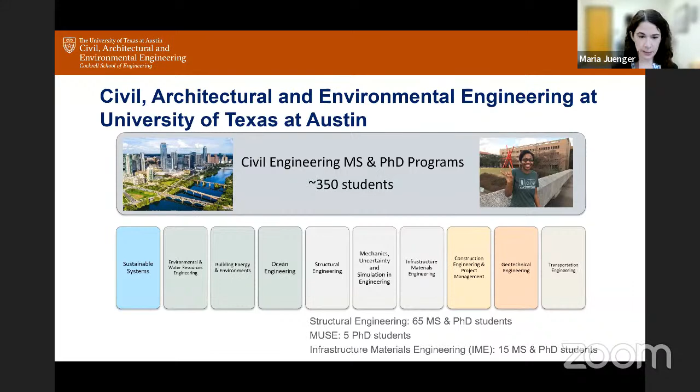Interestingly, I went to Google this weekend and looked up supplementary cementitious materials in images. I do this sort of thing sometimes - I look up green concrete, all kinds of things just to see what Google shows me in terms of images. And 90% of the images it shows me is the little array of SCMs from the Portland Cement Association textbook that has different colors of powders of SCMs.

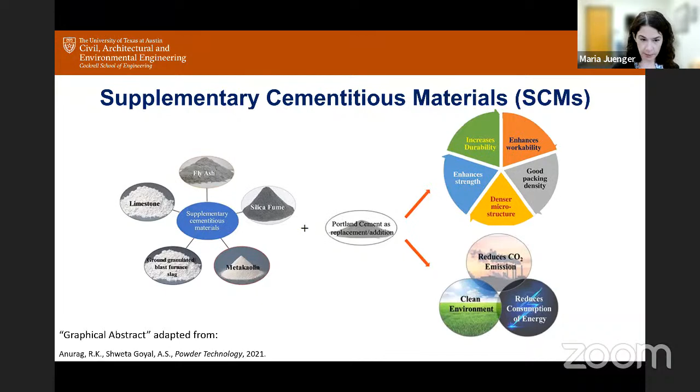Some of it could be changing the thermal energy efficiency in the cement plant. You can switch to lower emitting fuels. You can reduce the clinker to cement ratio, or you can use other innovative technologies like carbon capture. I would argue that these are all really important. However, they each come with a different pathway to get there and a different cost associated with that pathway.

So the reason I like to focus my research on SCMs is because it's something that I can do. I am not capable, as a material scientist and chemist, of actually going through and trying to make a cement plant more thermally efficient. That's a manufacturing issue, right? Fuel switching can be, depending on how you look at it, a mechanical engineering like thermal fluids or chemical engineering issue. It's not a material science issue. Carbon capture is a mixture of both manufacturing and industrial technology, and potentially a material science issue.

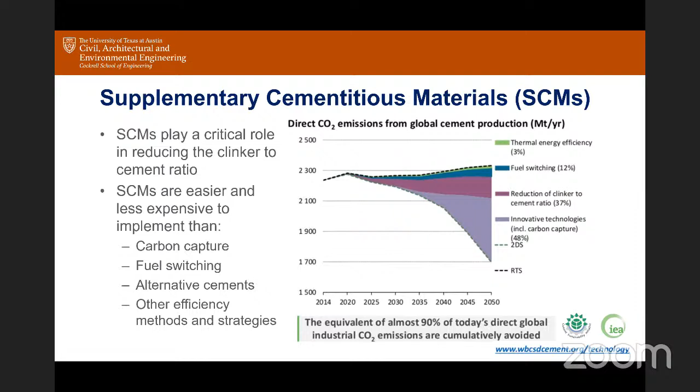Likewise, alternative cements, I've worked quite a bit with alternative cements, including calcium sulfoaluminate cements and geopolymers. And I'm still working quite a bit with geopolymers. Those are harder to implement because it's a technology gap to actually use them. SCMs make concrete that looks like concrete, smells like concrete, behaves like concrete. It's all normal. It makes it easier to implement in the industry. Not to say we shouldn't look at the other things, but they're going to be further in the future.

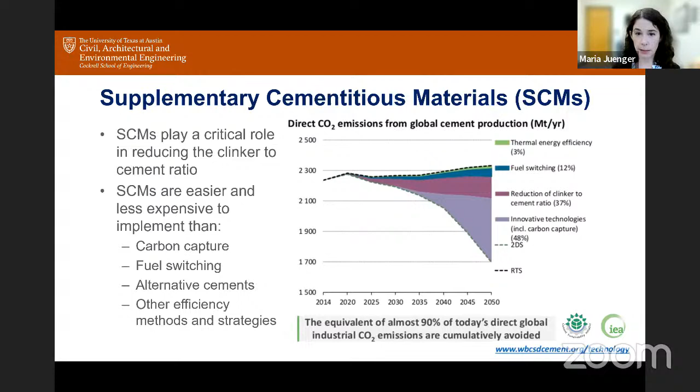Okay, so one of the primary SCMs that people use, hold on a second, I'm looking at the chat.

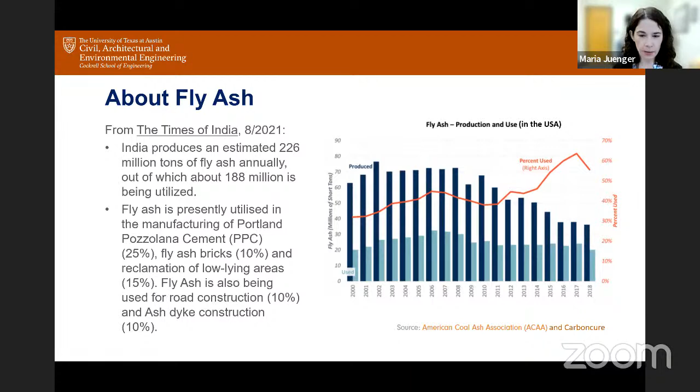So I thought that was really interesting for context. India is in a very different position in terms of fly ash usage, even moving forward, than we are in the US, and in a different position than where we are in other countries as well. The US and many other countries can no longer rely on fly ash as their primary source of supplementary cementitious materials. And that's because there's a huge push to reduce coal burning for power production, for a lot of reasons.

The power plants are aging, and the repair and maintenance costs exceed the cost of building, for example, a natural gas plant or some other type of power production facility. So that's one reason, especially in the US.

In a lot of other countries, it's driven by environmental concerns. They don't want to, they would like to reduce coal burning power.

And so we're in a position now where we can't rely on fly ash because the fly ash production is going to decrease over time. And so a lot of the research that I'm interested in is diversifying those SCM sources so that we can reduce our reliance on fly ash for durability and for environmental concerns in concrete.

One of the ways I think about this is a little bit different than the ways that some other people have thought about it. And I'm increasingly shifting my mindset to this point of view: I don't want a great SCM. I don't want the best. We don't want to be number one. We want to be just good enough. So that's the focus of this talk, is when we're looking for a material, we want a material that is just good enough. I'll explain why in a few more slides.

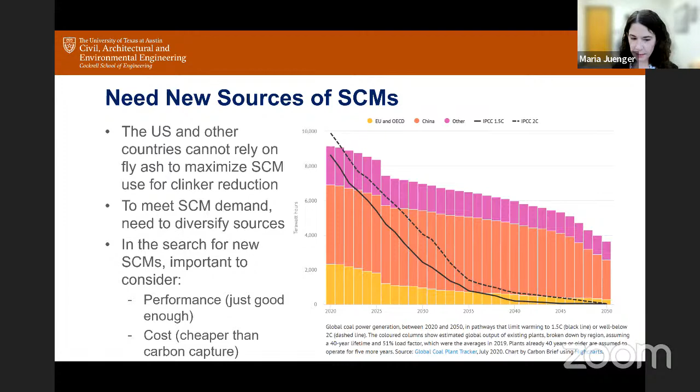The good news when it comes to trying to find replacements for fly ash is it's not a great SCM. It is not a high performer. It is a mediocre material.

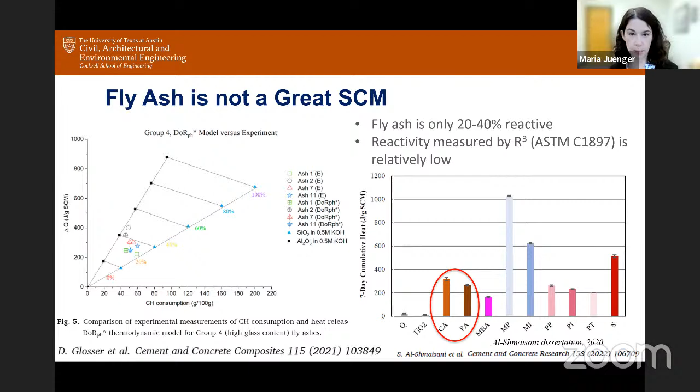If you just look at this plot, this CA is a C fly ash and the FA is an F fly ash. Compared to other materials that were tested, it's not the best. So when we're trying to replace fly ash as an SCM, the bar is low in terms of performance of the material. We're not trying to replace a great material with a great material. We're trying to replace a mediocre material with a mediocre material. And that's promising in terms of evaluating sources.

So in terms of research questions that I want to talk about today: assuming fly ash is our reference SCM, we're trying to replace fly ash in concrete mixtures. We don't need great performance from what we're trying to use to replace it. We just need it to be as good as fly ash, and people will be pretty happy with the performance of their concrete.

The other point to think about is, it is better from an environmental clinker-to-cement ratio reduction perspective to use a high quantity of an average performing SCM than a low quantity of a high performing SCM.

We want to reduce the amount of clinker in our cement, which means we want to have a high amount of SCM in that system, which means we don't need a really highly reactive material to get there in a small quantity. Silica fume at 5 to 10% doesn't really get us much in terms of clinker reduction. Fly ash at 30 to 40% is better. So that's where we're heading here.

So what this opens opportunities for, and what I'm going to talk about today, is impure natural pozzolans. How do we get these sort of less pure, mediocre materials to work in our concrete mixtures? And also blends of materials, blends of natural pozzolans with fillers, for example coal combustion products that are underutilized, and other materials to create these tailored mediocre materials. Let's aim for the middle.

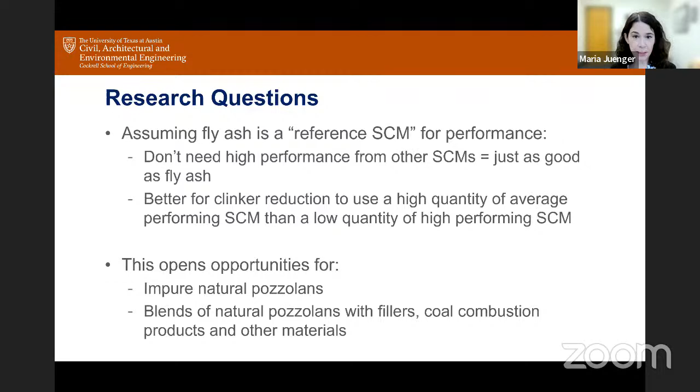In terms of natural pozzolans, we can talk later about what sources are available in India and other regional countries. In the US and in many other parts of the world, we have some deposits of volcanic natural pozzolans.

The one shown here on the right is in Arizona in the US, a quarry I visited in 2019, I think, and this is a pumicite type deposit. You have these volcanically derived minerals like pumice, perlite, volcanic ashes, and zeolites, or you have sedimentary pozzolans, so calcined clays and shales of various compositions, including metakaolins. The sedimentary pozzolans are known to be more prevalent globally than the volcanic pozzolans, but both are considered natural pozzolans.

The general thinking up until recently is that natural pozzolans aren't necessarily great materials to use as SCMs because they're only regionally available, not widely distributed. That's changing. What is slow to change is the commercial availability of these materials. Many of these are easier to obtain for research purposes than they are to obtain for actually making concrete mixtures. That'll change with time as well as the market matures for these materials.

What I want to talk about today is not these really nice, pure, clean natural pozzolan sources, but the stuff that the quarries are throwing away. For example, overburden materials - we'll talk about that. You can take a waste product of an industry, a waste product of a natural pozzolan industry, and also blending materials to try to optimize that mediocrity.

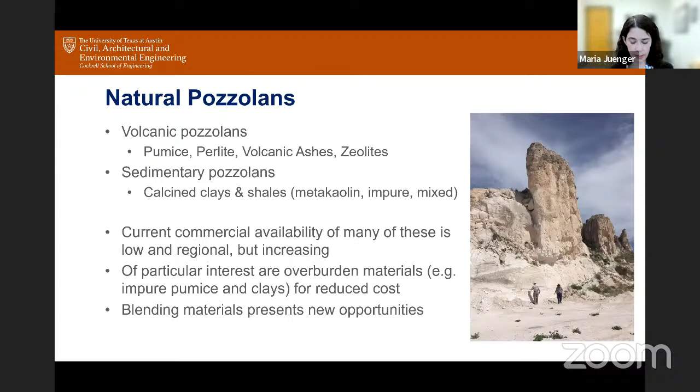Okay, so I'm going to go through some case studies from our research. These are all taken from different types of projects to demonstrate what I'm talking about here. Case study number one is what I would call an impure pumice.

Pumicite is used for a lot of different commercial products. For example, every time you have jeans that you wear, most of those are washed with pumice. Pumice is used in cosmetic products and for a lot of different industrial purposes. Most of what's sold in terms of pumice is a sort of pure white material, and that's what the other industries like.

But in order to get to that pure white material in a quarry - if you look at this quarry, this picture I just stole off of Google search - you see that the top layers aren't so white. That top layer, for an industry looking for a pure white material, is not desirable, so they actually stockpile it and discard it. You take something that's a quarried material and it has a byproduct too. Its byproduct is overburden, as they call it.

If you look at these two buckets at the bottom, the one on the left is a more pure pumicite, the one on the right is an overburden pumicite. It's more tan colored. What we're interested in is: we know the pure pumicite works great as an SCM. How does the tan one work? We can get that one cheaper - it's a byproduct material that nobody else wants. Can we use it for our industry?

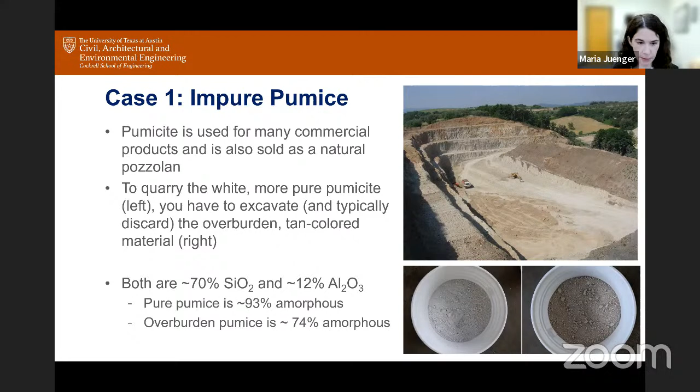They also have overburden. In terms of evaluating these materials, one of the first things we do in our lab is run the R3 test, which started out being called R3 because it's the Rapid, Relevant, and Reliable Test—a very optimistic name. It's now standardized under ASTM C1897.

These mixtures consist of mixing your supplementary cementitious material with a potassium sulfate solution, calcium hydroxide, and calcium carbonate. Then you have two possible means of analysis, only one of which I'm showing here: measuring heat release using isothermal calorimetry over a 7-day period. You can also measure bound water by curing it at 40 degrees and using a furnace, which is simpler, and the industry actually prefers that. In the labs, we prefer calorimetry, while the industry, if they don't have a calorimeter, prefers the bound water method.

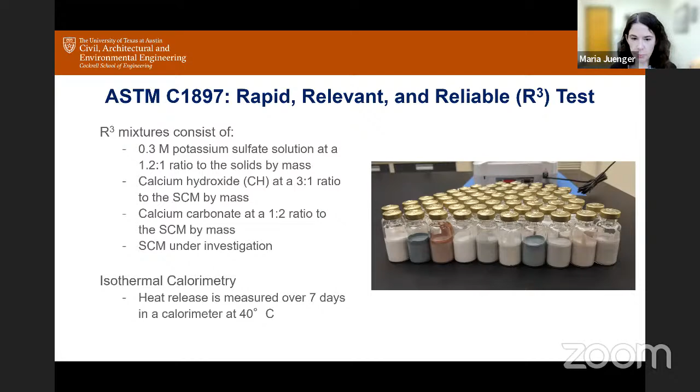As I mentioned, Jason Weiss's Pozzolanic reactivity test is a very similar test, but at a different solution composition and a higher temperature. So there are a couple of tests like this available out there.

When you run this test, you get, in this particular case, the heat released—the 7-day cumulative heat in joules per gram of SCM run in that calorimeter for 7 days at 40 degrees C. Different materials give different values; the higher the value, the higher the reactivity. These gray materials here on the left are quartz, shown as Q, and titanium dioxide. You expect these are not pozzolanic, so therefore they have no heat—that's really just a check against an expectation.

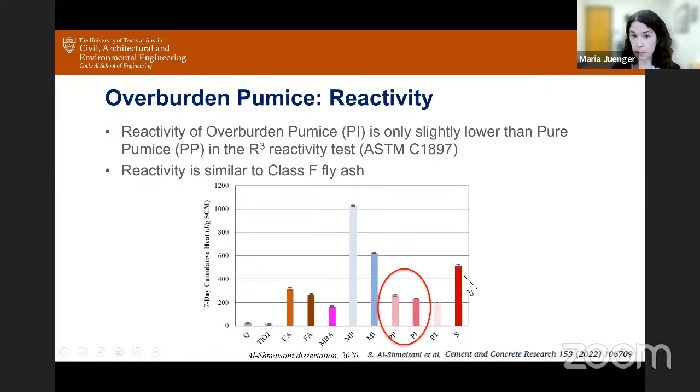If we look at the fly ashes, the CA and FA shown earlier, and the pumices, the PP—again, silly names, but this is what they have. PP is pure pumicite, PI is impure pumicite, the overburdened pumice. They actually have a very similar reactivity to the class F fly ash in this test method. So it's really not so different, and the impure pumice is not so different from the pure pumice, which is promising in this test method.

Another thing we like to look at is compressive strength. These are compressive strengths of mortars according to ASTM C109, with 25% of the cement replaced with the SCM. The black columns are the Portland cement reference, shown as 100% relative strength at that particular age. The dotted lines are 85% and 75% lines, just to get a sense of what you'd expect these materials to do.

If you look at the fly ash, it's above the 85% line, but not as high as Portland cement by 28 days. If you look at the pure and impure pumice, they end up being quite similar to Portland cement at 28 days and higher than Portland cement at 90 days. So they're actually outperforming class F fly ash in compressive strength, which suggests that from a performance perspective, at least with respect to strength, they're good substitutes for fly ash—better than fly ash.

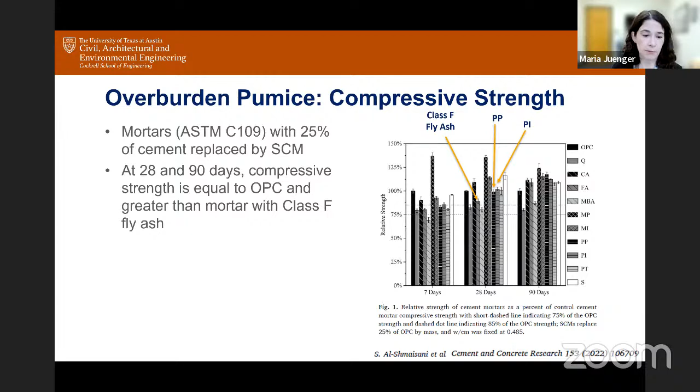Another thing we often look at is how these materials control expansion due to alkali-silica reactions—how do they impact durability? In this test, the black line is the control, the aggregate with just straight Portland cement. All of the pure pumice, the overburdened pumice, and the class F fly ash reduce expansion below the threshold in this 14-day rapid accelerated mortar bar test. So they all behave similarly in terms of durability.

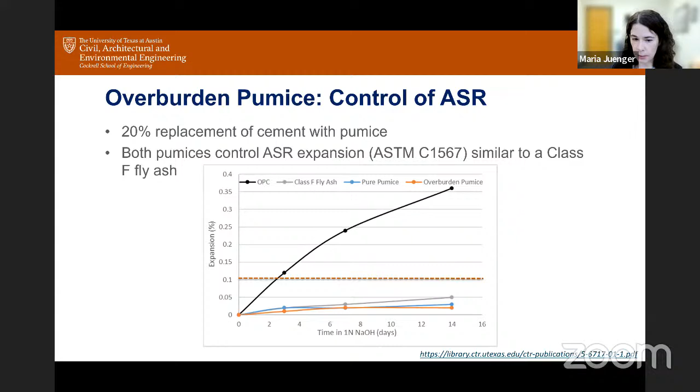We have more data on this—I'm just showing examples here—but from all the testing we've done, this overburdened pumice material is a lower cost alternative to the more pure material, with quite similar performance despite the small difference in amorphous content. The control of ASR expansion is excellent for both. There's some concern in the community about the alkalis present in these natural pozzolans, since their alkali content is pretty high, but we've shown this doesn't affect their ability to control ASR, because these alkalis are not soluble. So they're really quite good materials when you're looking for a fly ash replacement.

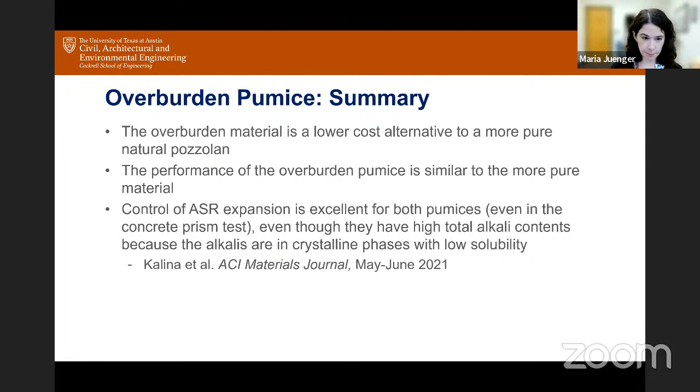Okay, another case study I want to bring up—something I'm pushing quite a bit right now in the US—is the concept of an impure metakaolin.

We know that metakaolin is a highly reactive pozzolan, but it's used in really small amounts because it has a high impact on workability. As I mentioned earlier, we don't want the 5, 10, 15% replacements in terms of clinker to cement ratio. We really want higher replacement levels to reduce the clinker contents in our cements, so this 15% isn't good enough.

In the past 12 years or so, there's been an increasing body of work on impure clays. Some of these contain different clay minerals like montmorillonites, bentonites, and illites, and some increasingly just contain crystalline impurities such as quartz and other mica and other minerals.

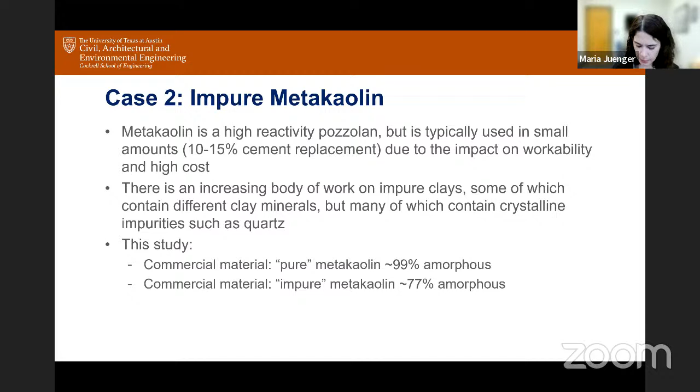I would say that all of these types of materials are worth investigating and worth sourcing for concrete mixtures. The particular example I'm going to show you today is a commercially available pure metakaolin type material compared to an impure metakaolin material that's primarily quartz mixed in with metakaolin, so it's not a reactive material. You see the difference in amorphous content there of 99 versus 77%. I have some other materials I'll show you as well, but in this case study I'm focusing on these.

When we talk about workability, this is a good graphic demonstration of what metakaolin does to the workability of a concrete mixture. This is actually a mini slump test on pastes, not a concrete mixture, where the mini slump cone diameter is 40 millimeters at the bottom and the height of the cone is 60 millimeters. If you replace Portland cement with a relatively pure metakaolin, you get a very, very low slump, which is expected.

Compared to the Portland cement shown here, a class F fly ash has a greater slump spread. We measure the spread, not the height, generally in these mixtures. Then this sort of moderate purity calcined clay, something similar to this 77% amorphous material, ends up having a mini slump spread very similar to Portland cement. So you are moderating this problem with workability by reducing the purity. That's promising.

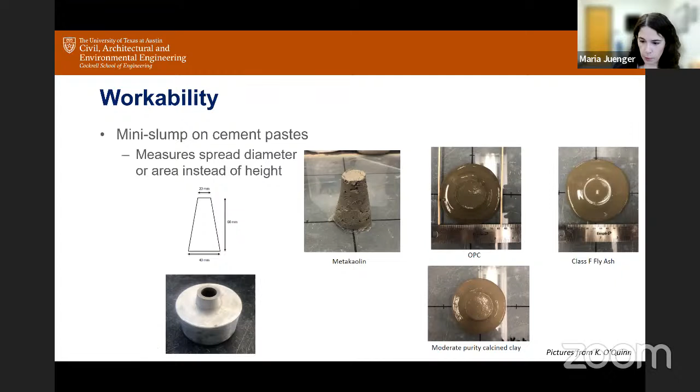The other thing that happens with this is, of course, if you reduce the purity, you reduce the reactivity. This is the R3 test again. The MP is the pure metakaolin, and the MI is the impure metakaolin in this plot. We can see that both of these, even the impure one, are much more reactive than other SCMs. They're much more reactive than these pumices, and much more reactive than the fly ashes. Even when you make it less pure, you still have a greater reactivity from that material.

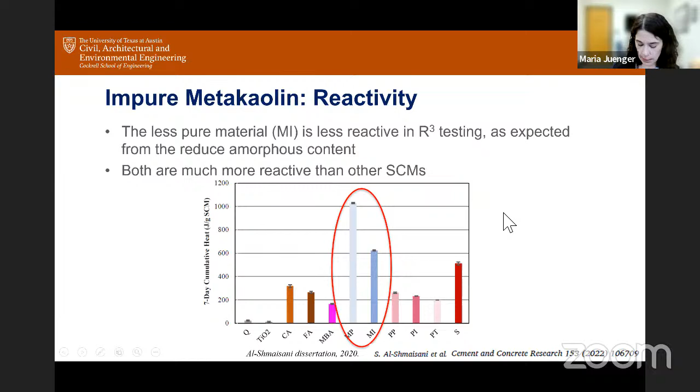And when it's 77% amorphous, I have other examples here from another research study. This is from my current student, Caitlin O'Quinn, where she's looking at a lot of different impure metakaolin sources. The ones that say C are commercially produced materials, so this CK99 is a commercially produced 99% pure metakaolin material, whereas the L ones are calcined in the laboratory. So LK25 only has about 25% metakaolin in the system.

What I wanted to point out from this work is fly ash, in terms of reactivity in this R3 test, is really low. You can have a calcined clay with 25% metakaolin, and its reactivity is pretty similar to a fly ash. You don't need a really pure material to hit that bar of expectation when you're replacing fly ash. In fact, 25% is plenty if that's your goal, if your goal is to replace fly ash. So that's something to consider.

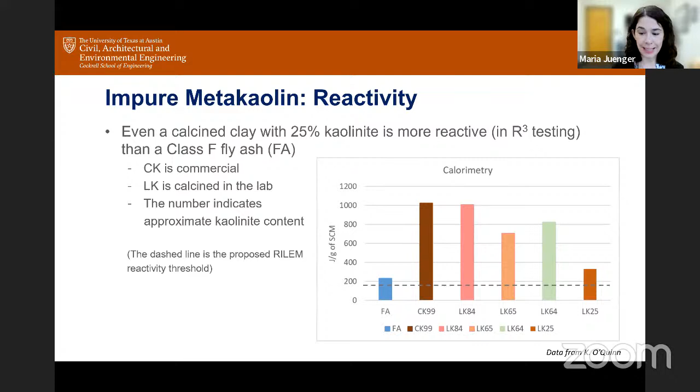Does that mean you have to go and look for sources that naturally in a quarry only have 25% kaolinite? No. I would argue that you can start blending these with other materials that are inert, similar to this, to the LC3 system, but it doesn't have to be limestone. It can be quartz, it can be other natural minerals. You can start blending to reduce the purity of this kaolinite in order to create a material that hits your targets in terms of workability and reactivity.

Again, if we look at compressive strengths, this is the same plot shown earlier, just looking at the metakaolins. The metakaolin at 28 days is significantly higher than the fly ash and the OPC, and even the impure metakaolin is higher than both as well. So these materials are certainly sufficient and adequate for replacing cement in concrete, and will provide good performance.

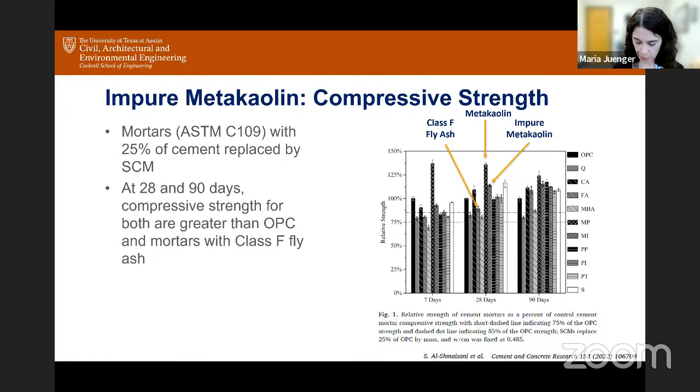There's even work from Francois Avet and Karen Scrivener, but I think this plot is really meaningful, so I'm sharing it with you because I think this is an incredibly valuable plot. What this plot shows you is Portlandite content versus calcined kaolinite content.

So if we're looking at something, for example, that has a 25% kaolinite content versus, let's say, a 90% kaolinite content, that's what this x-axis is, and the colors are at different ages. What becomes really clear is that the consumption of calcium hydroxide by the SCM pretty much tails off at 50 or 60%. There's no reason to ever go higher than that because you're not able to consume more calcium hydroxide in that system. You hit a wall.

The other thing to note that I think is even more important is this degree of hydration of clinker versus calcined kaolinite content. If you look at the 28-day data, as you increase kaolinite content, your degree of hydration of clinker reduces. So you're actually not optimizing your system. You're actually reducing the effectiveness of the cement to hydrate by adding higher purity kaolinite. So having a lower purity kaolinite allows your cement to hydrate fully.

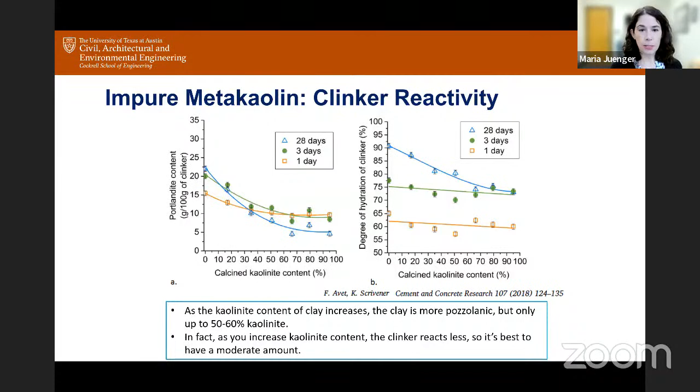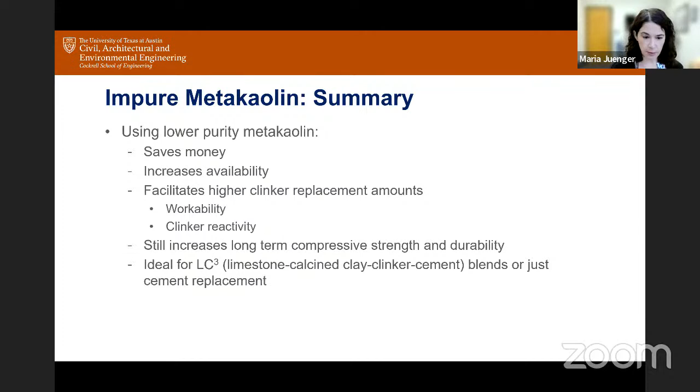So again, pushing for this concept of lower purity is better. It helps workability. It helps you get adequate strength, but it helps optimize the efficiency of your system as well. It also saves money. If you use less pure material, no one else wants it. In the other cosmetic industries and other higher dollar industries, we save money. We increase availability because we can explore a wider variety of sources that other industries aren't using. And we can still get the benefits that we have from those systems.

Okay, the last topic I want to talk about is blends with coal products. So when we talk about the use of fly ash and the production of fly ash, we're often just talking about fly ash. We're not talking about the other products that are byproducts of the coal combustion process. For example, there's a material called bottom ash. We have flue gas desulfurization ash. We have other types of materials. Economizer ash is another one that comes out of these power plants that we're not using in concrete.

We also have fly ashes that don't meet specifications. For example, in the US, ASTM C618 that specifies fly ashes has boundaries on a lot of things in the fly ash, including the sulfate content and the sum of oxides and other chemical properties of the material. Right now, those are not allowed to be used in concrete under ASTM C618. It doesn't mean they're not allowed—you can always go off spec. But according to the specifications now, these are not allowed materials.

The other interesting issue we have in the US is that the Class C fly ashes that have higher calcium are now considered less desirable in terms of materials to use in concrete mixtures because they don't assist with our workability, with our durability of concrete as much as Class F fly ashes. So they are less used, which means they are more highly available.

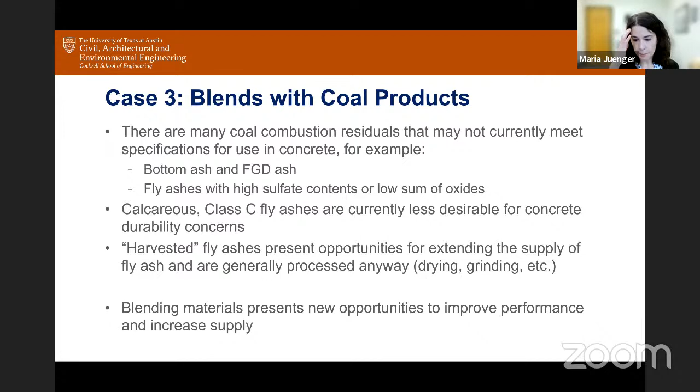What we have been looking at, and what other people as well are looking at, is not just looking at these materials in isolation—not just bottom ash, not just off-spec fly ashes, not just harvested fly ashes—but what happens if we blend these? If you're harvesting anyway, you already have to dry and grind it. Why not blend it to optimize it and sell it as a product that's more highly processed or engineered or optimized? So we have this great opportunity to not just take a product as is, because that's the cheapest way, but actually to optimize the performance of our products and to expand the resources of what's available by blending and processing. That's what I want to address today, with a few examples.

So one example is milled bottom ash. Bottom ash from coal power production is the material that falls to the bottom. It has a lower amorphous content than fly ash.

In this particular example, the amorphous content of this bottom ash is about 66%, and the amorphous content of the fly ash is 83%. The bottom ash has a lower reactivity.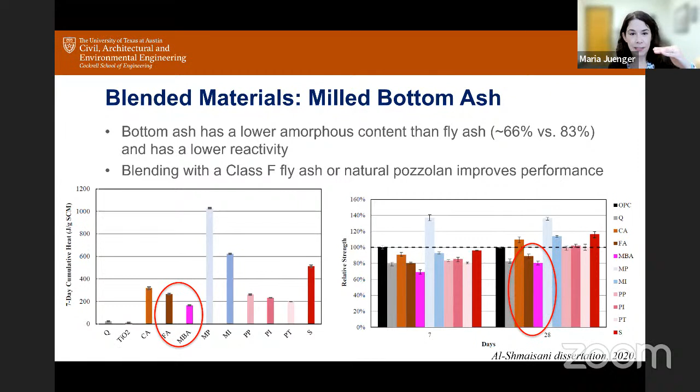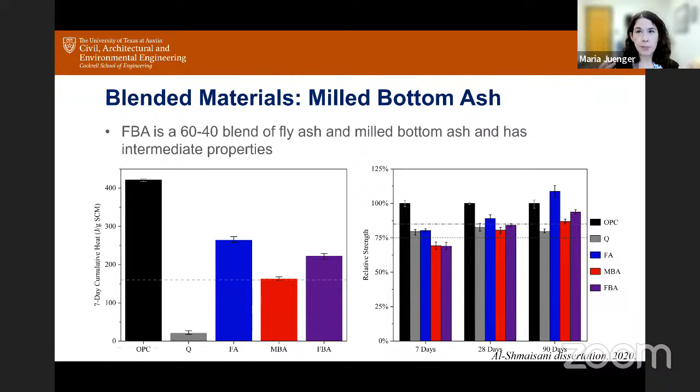So what you can do is blend it. In this fly ash R3 test, cumulative heat, this is the fly ash, this in red is the milled bottom ash, and this is a blend of 60% fly ash, 40% milled bottom ash. That blended material suffices in terms of performance and strength. You get a better material by optimizing your resources through blending.

Where you do have to be careful is what are some of the other consequences of blending. So what I'm going to present next is a bit of a cautionary tale. For the most part, anything we've done with blended materials in our lab, whether blended by a commercial producer or by us, the vast majority work beautifully. They are great opportunities. I'm cautious presenting this because these are just tiny drawbacks. I don't want you to come away thinking blending is bad. Blending is good, but there are some things you need to be careful with, and that's what I'll talk about next.

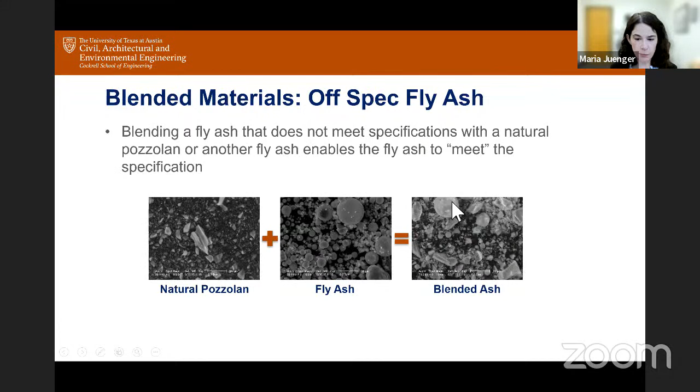One example is if you take a natural pozzolan and blend it with a fly ash, you get a blended pozzolan ash material. This is an excellent opportunity to optimize and engineer your blends for performance by taking advantage of available resources. These are SEM images of a natural pozzolan, a fly ash, and this blended material, which shows rounded particles and angular particles mixed together.

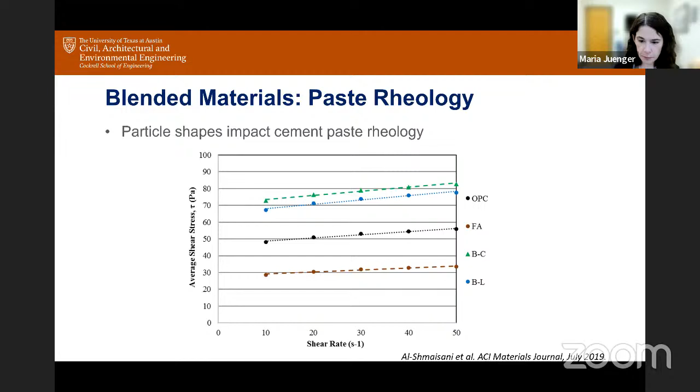So the cautionary tale here is, just because you can meet a specification in terms of composition doesn't mean that you've gotten rid of the performance problems from that original material.

The other problem we've encountered, for example—and I don't think I have data on this, so I'm going to talk about it on this slide—is if you have a class C fly ash that doesn't protect well against sulfate attack because it has C3A and other cementitious phases in it. If you blend that class C fly ash with a natural Pozzolan or with a class F fly ash to reduce its calcium content, you blend it to try to meet a class F specification.

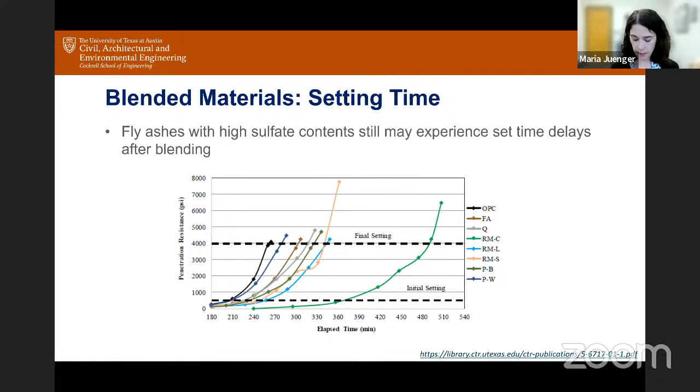And so it complicates our need to characterize these materials and understand them better. We can't just use our current specifications that are based completely on oxides. We have to be a little more careful, and maybe it requires that we do X-ray diffraction to look at the type of sulfate that's in the system, and the type of C3A that's in the system. Because once we start blending, we have a lot more unknowns, and a difference in the way things behave than the way they were originally.

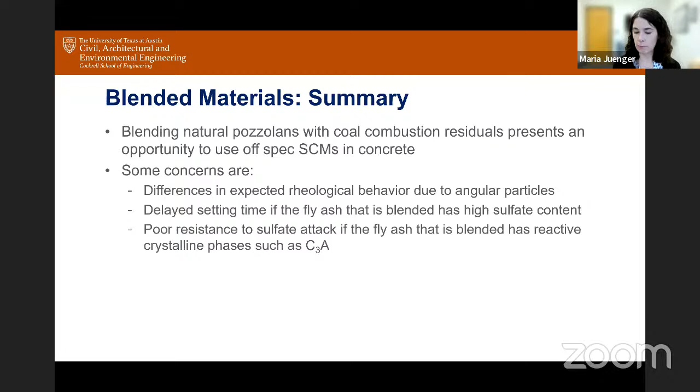So I think we have a lot of opportunity to start blending and mixing materials, not just natural Pozzolans, but even inert materials with coal combustion materials and other products, to expand our resources and take advantage of everything available. But we have to be careful with rheological behavior, the sulfate content, and the C3A content, which may necessitate changing specifications to demand X-ray diffraction, which in the US in C618 they do not currently require. So it's something to think about moving forward.

Okay, so in conclusion, I think we need more supplementary cementitious materials, and we need to get them creatively by taking advantage of resources that are available and trying to optimize the use of those resources—but not optimize for high performance, optimize for medium performance, because then we can use more. We need to be careful about workability, setting time, durability.

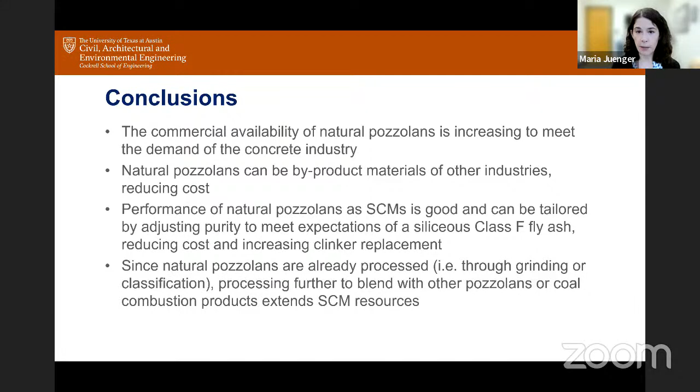We need to be careful about characterization. We need to be really careful with specifications. But we have a huge opportunity here to get more creative about our sources of supplementary cementitious materials and how we produce and use them and optimize them for our use. And this includes coal combustion products and also natural Pozzolans, or whatever else comes out there—ground glass and other materials as well. So I think we have a lot of opportunities, but we also have a lot of challenges in terms of commercial production, but also characterization and specification.